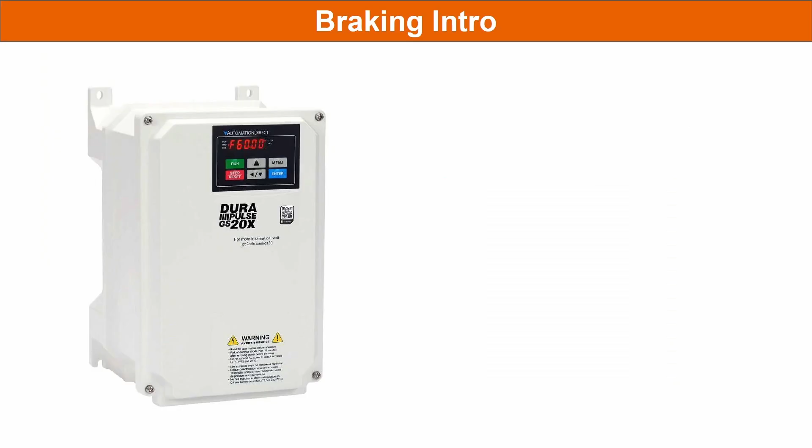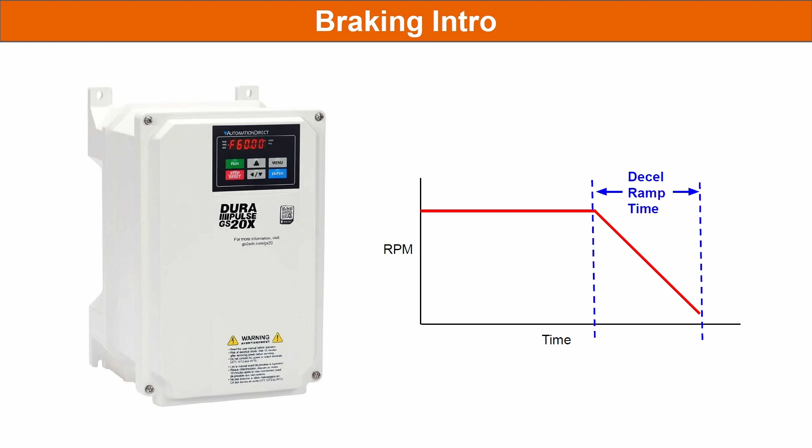When you tell the drive to decelerate a spindle, the drive automatically figures out how much reverse force to apply to get the spindle to slow down within the deceleration time. But there's a problem with that, and to understand that, you need to understand how a drive works.

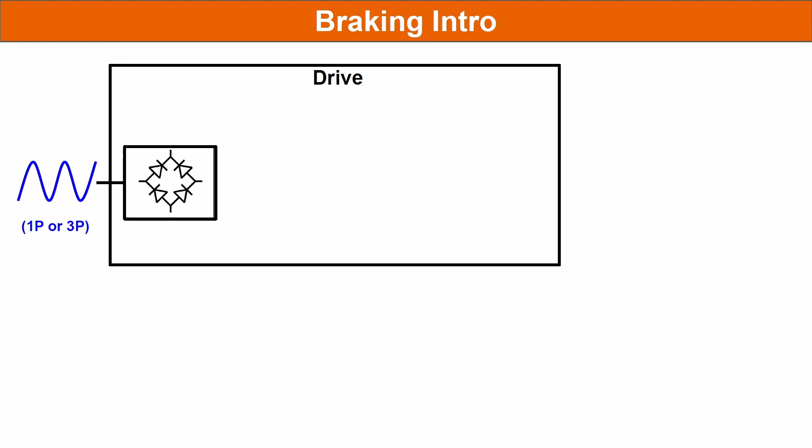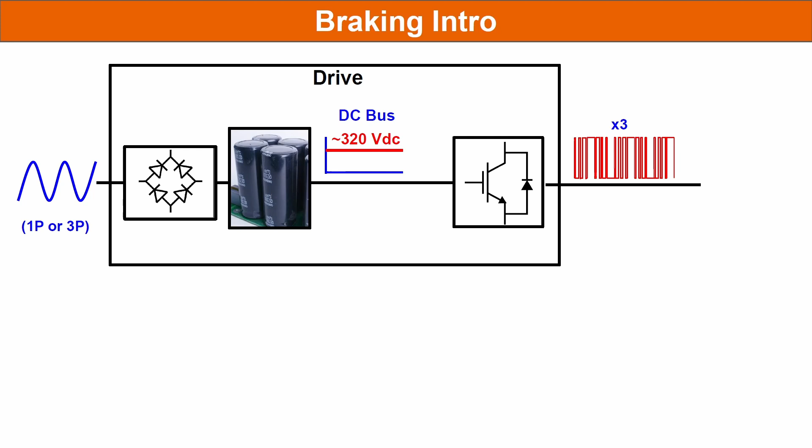In the simplest terms, the drive takes a sinusoidal input, single or three-phased, rectifies it, and sends it to some large electrolytic capacitors to create a DC voltage. For example, in the drive I'm using, the DC voltage runs in the mid 300 volt range. The drive then uses some large transistors called IGBTs to turn a DC voltage on and off in a pattern whose average magnitude emulates a sinusoidal waveform.

Because the power to the spindle is controlled by digital on-off pulses, the drive can very accurately control the motor speed by adjusting the frequency of the pulse waveform. For our spindle, a frequency of 400 Hz gets us 24,000 RPM. We'll use the terms frequency and speed interchangeably in this video since they both tell us how fast the spindle's rotating.

Here's the problem. When the drive applies pulses to force the spindle motor to slow down, all of the inertial energy built up in the spindle has to go someplace, so it gets pushed back into the drive. If you're familiar with regen on an electric car, yeah, that's the same thing. That regen pushes energy back into the large capacitors, which raises the DC bus. The faster you try and decelerate the spindle, the higher the DC bus goes.

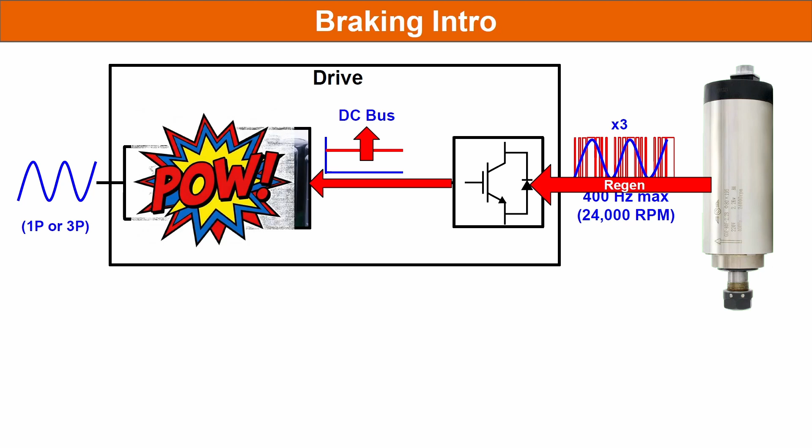If the DC bus voltage goes higher than the components in the drive can handle, well, they start to fail and your drive dies. Most drives will sense this, throw an overvoltage fault, and turn off the IGBTs. The spindle's then left to spin down on its own.

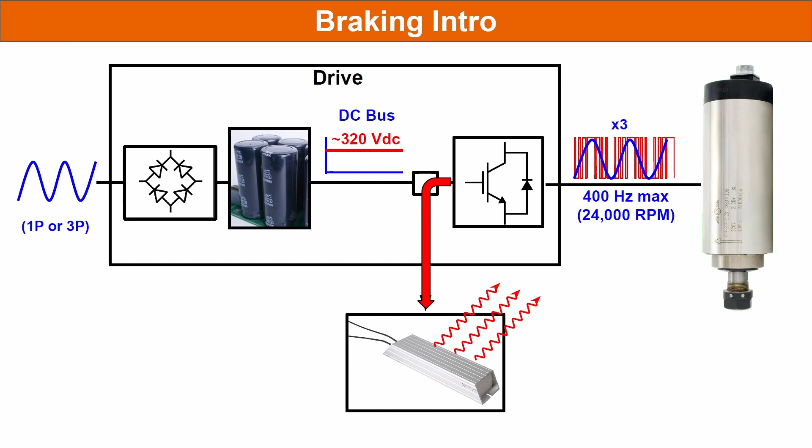The solution is simple. Add a high wattage braking resistor. The GS20 drive will automatically reroute any excess energy to that resistor, where the excess energy gets released as heat instead of raising the DC bus. On the GS20 series of drives, you just add the braking resistor to these terminals. I also added a switch so we could quickly switch the resistor in and out for our testing.

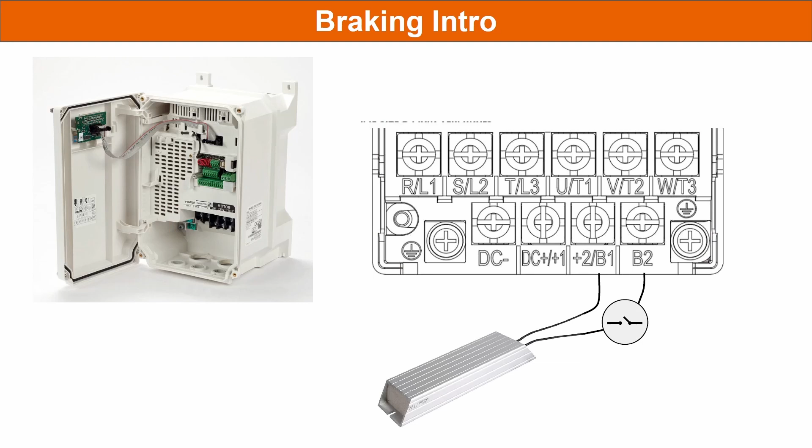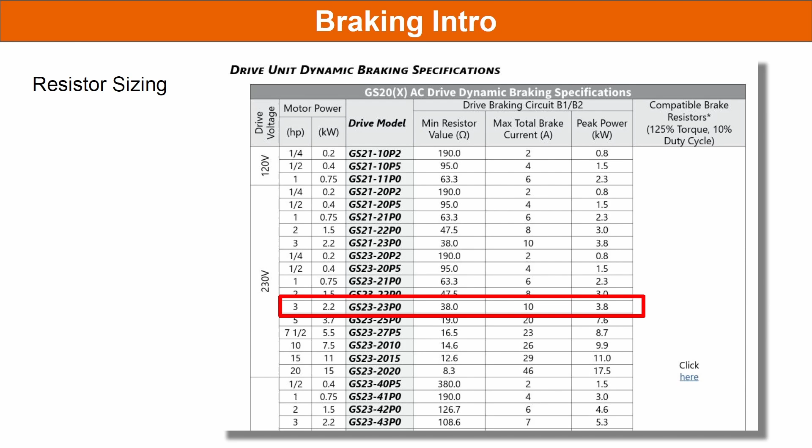How do you know what size resistor to add? Well, for the GS20 drive, it's easy. Appendix A of the user manual has a chart that says for our drive, the minimum value resistor is this, which limits the max current to this, so the max power it needs to dissipate is this. Given that, you can go to Amazon to find a resistor that'll work, or click on this guy to see all the compatible resistors Automation Direct has. Scroll down to our drive, and we see this guy is the recommended resistor.

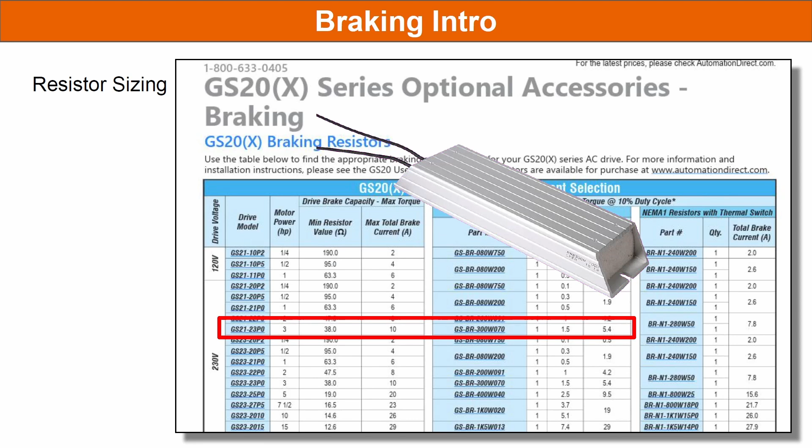That's all there is to it. No parameters or configuration required. You just hook up a resistor. Everything else is done for you.

Let's do an example. We're going to make heavy use of the GSoft2 drive configuration software in this video to change drive parameters and to monitor what's going on inside the drive. It's free, and Automation Direct has a bunch of tutorial videos showing how to use it, so I'm just going to use it here without a lot of explanation in this video. I'll put links to the free download and the videos in the description below.

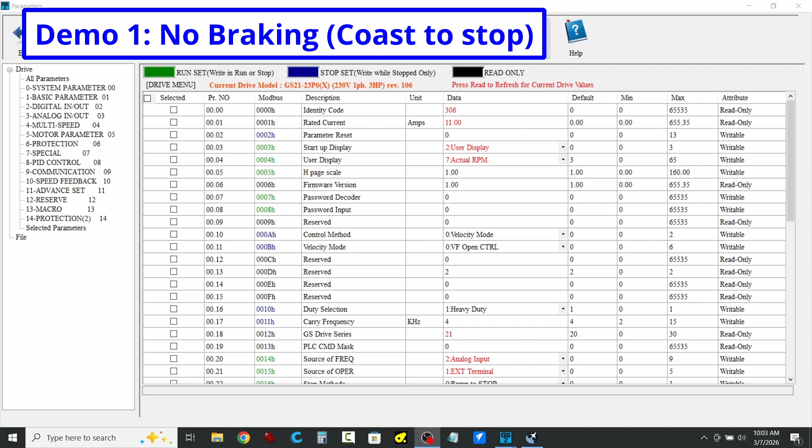First, let's see what happens when we tell the drive to just let the spindle coast to a stop with no controlled deceleration from the drive. The good news is, since the drive isn't forcing the spindle to stop in a certain amount of time, there won't be any regen to deal with. I put a large surfacing bit in the chuck just to add a little more inertia to the spindle.

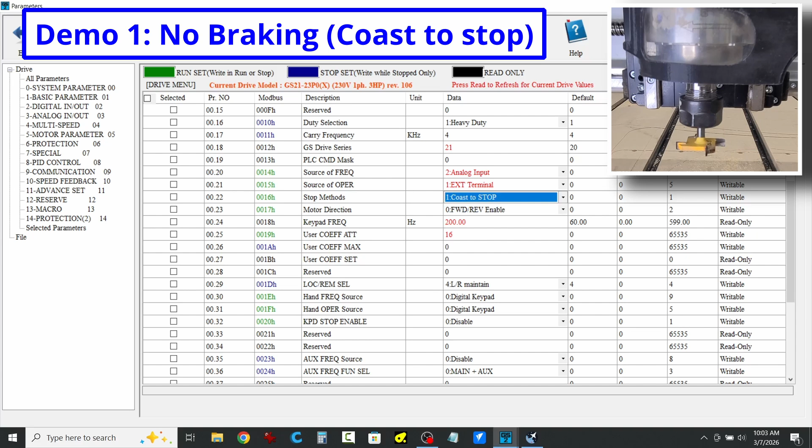Parameter 0.22 is the stop method. Set it to a 1 to coast to a stop. I love the way GSoft2 tells me everything I need to know about a parameter at a glance, no looking stuff up in the manuals. We see the write was successful.

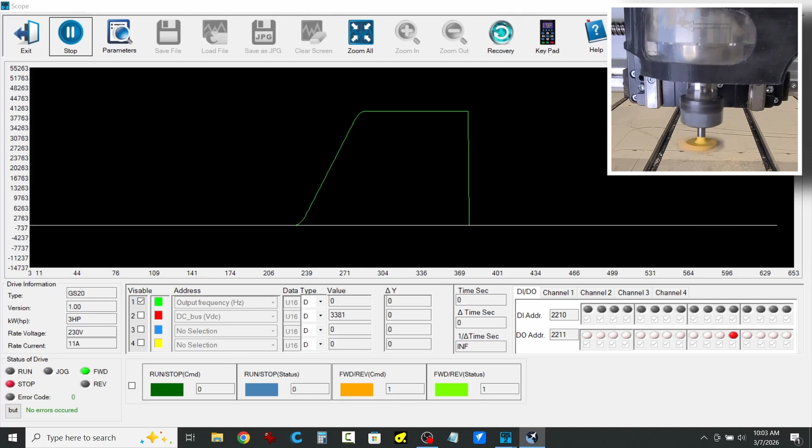I'll bring up the scope function in GSoft2 and monitor the spindle speed. Start the scope, and in GSender, I'll set the spindle to 24,000 RPM and hit run. Wait for the spindle to ramp up to speed, then stop the spindle, and wait for it to ramp down. This is going to take a few seconds. While we're waiting for the spindle to stop, I'll show you that I'm using GSender on a separate screen to control the spindle using this guy down here.

Okay, the spindle finally stopped. I'm going to adjust the scope display so we can see where the spindle ramped up to speed, and when we hit stop, and the drive turned off the IGBTs, so the drive output went to 0, and the spindle was left to spin to a free stop. So it took about 15 seconds for the spindle to coast to a stop on its own.

Now I'm assuming you're watching this video because you don't want to wait 15 seconds each time you stop the spindle. So let's do that again, but this time, let's go back to parameter 0.22 and tell the drive to do a controlled ramp to stop. Now the drive is going to try and control the spindle's deceleration. Parameter 1.13 is the deceleration ramp time. Let's set that to a reasonable 6 seconds.

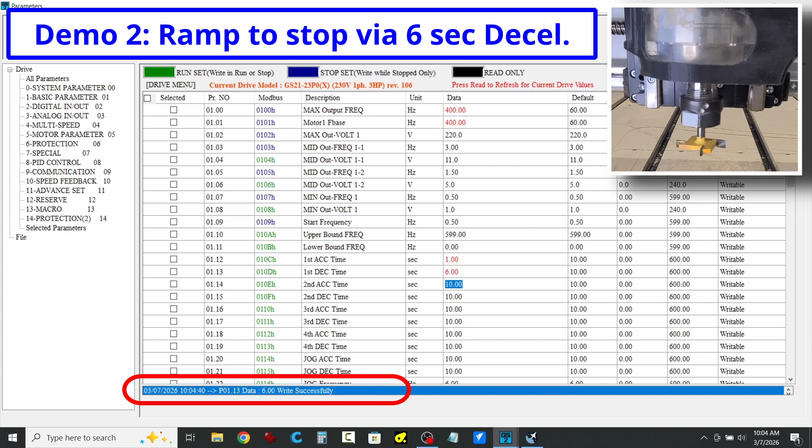The write was successful. Go back to the scope, start it, and start the spindle. Wait for it to ramp up, then hit stop. Adjust the display and measure the time it took to ramp down. Yep, right about 6 seconds. Exactly what we asked for.

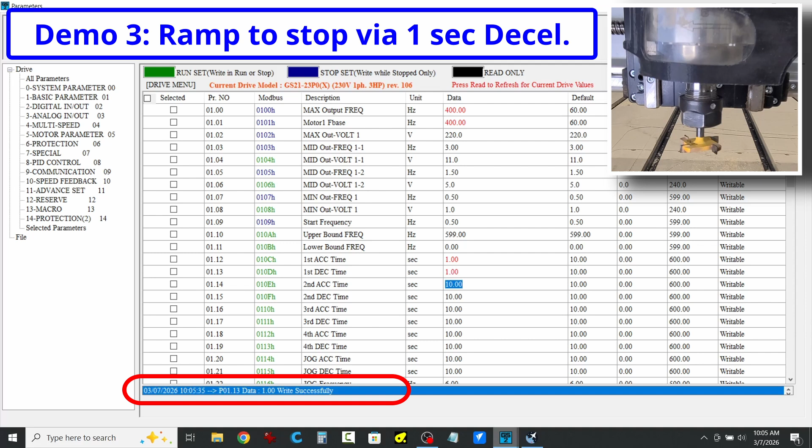Let's do something crazy and ask the drive to ramp from 24,000 RPM all the way down to 0 in just 1 second. Write was successful. Go back to the scope and hit run. Start the spindle, ramp up to 24,000 RPM, and stop the spindle. Measure the ramp time. Took a lot longer than the 1 second we asked for, didn't it? Clearly, the drive wasn't able to overcome the spindle inertia during the 1 second we asked for.

And what's the deal with these steps? Well, this is a special feature the GS20 series drives have that you won't find in inexpensive hobbyist drives. The GS20 drive is monitoring the DC bus voltage, and when the regen causes the DC bus to rise too high, it stops the deceleration ramp until the DC bus voltage comes back down. Then it starts ramping again until the DC bus voltage gets too high, when it lets the motor coast again.

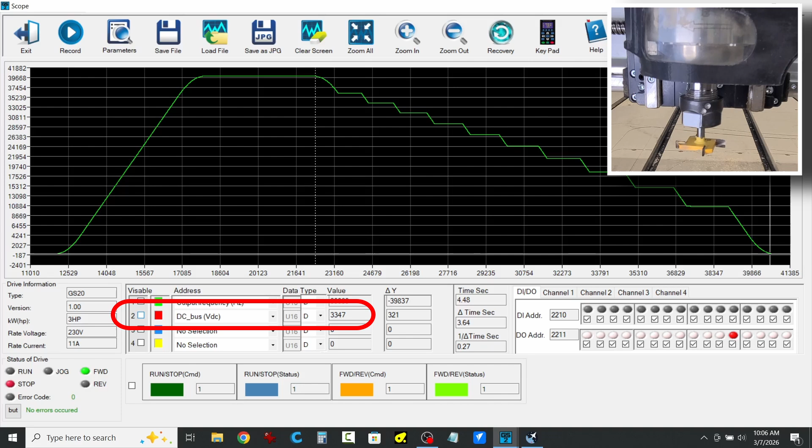You get the idea. So basically, the GS20 is pumping the brakes, braking a little at a time to slow the spindle as fast as possible without generating an overvoltage fault. And we can actually see that. If I enable the DC bus trace and zoom in on that, yep, we can see the DC bus started to rise and then come back down during the coast portion of the step. If I zoom back out, you can kind of see that.

It's too bad these two waveforms are on such different scales. It makes it hard to see everything graphically at the same time. But you can see the numbers as I scroll the cursor across the waveform. Each time the DC bus voltage gets too high, the drive turns the IGBTs off to let the motor coast while the DC bus voltage comes back down.

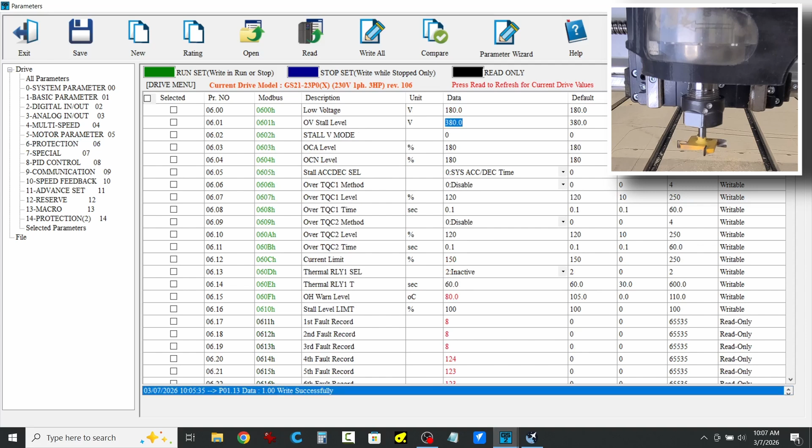The overvoltage trip point threshold is in parameter 6.01, which defaults to 380 volts for this drive. If we go look at our scope trace and zoom back in on the DC bus, sure enough, when the DC bus approached 380 volts, the drive released the motor to coast on its own.

If we disable this overvoltage stall prevention by setting parameter 6.01 to 0, what happens? Write successful, go back to the scope, hit run. Start the spindle, ramp up, stop the spindle. And guess what? We got an overvoltage fault on both the drive display and over here on the GSoft2 screen. And the spindle is spinning freely.

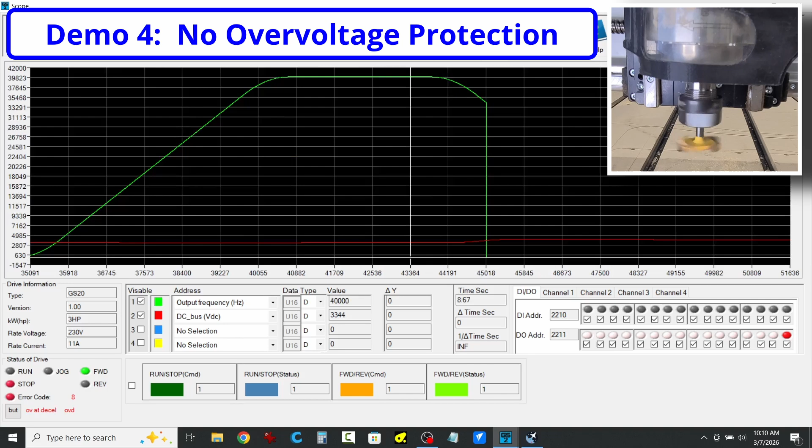Why? Because the DC bus got too big, so the drive just shut the IGBTs down to protect itself. This is how most hobbyist drives handle overvoltage faults. They just shut everything down. I'll press the stop to reset the fault. Re-enable the overvoltage protection by setting this back to the default 380 volts.

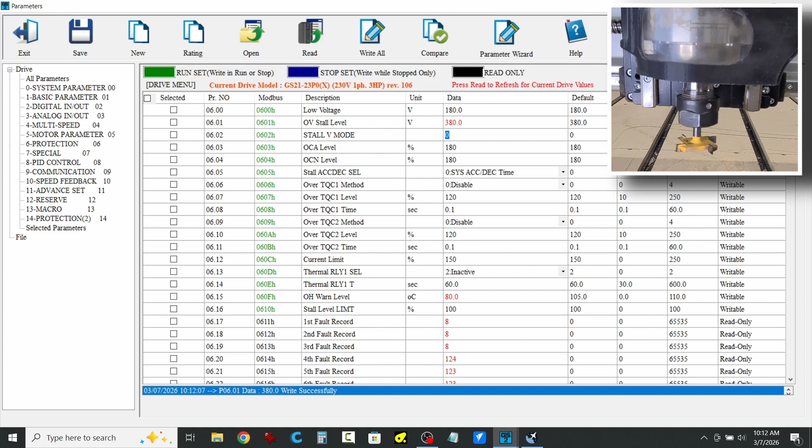Okay, so bad things happen if we try to decelerate the spindle too fast because it raises the DC bus. Got it. Now I'll flip the switch I added to enable the braking resistor and rerun that 1 second deceleration test. Start the scope, start the spindle, ramp up, stop the spindle.

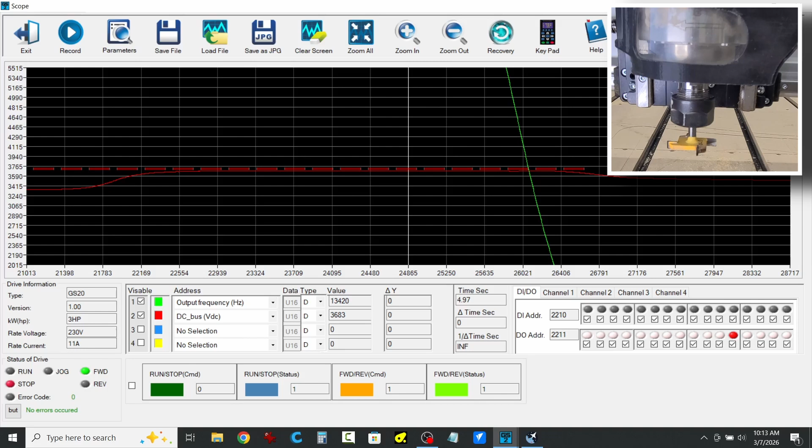Wow, look at that. It easily stopped the spindle in 1 second, and we can see when the DC bus got to this level, well below the 380 volt limit, it held steady because all the excess energy got rerouted to the braking resistor away from the DC bus. We can see how stable this DC bus was during this deceleration.

Nice. Well, that's all you need to know about braking to get super fast deceleration times on a GS20 series drive. To summarize, the GS20 braking options are: you can always coast to a stop. You'll never get an overvoltage fault doing that because you're not trying to force the spindle to slow down, so there's no regen energy coming back into the drive, raising the DC bus. The bad news is, it takes a long time for the spindle to come to a stop. Ours took 15 seconds.

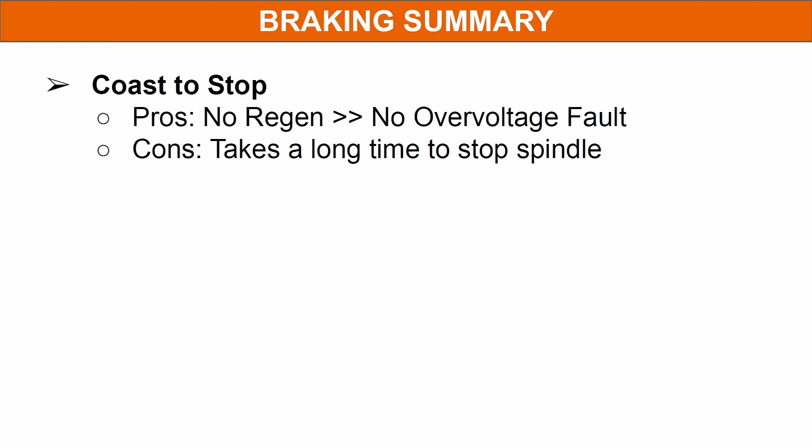You can have the drive automatically extend the ramp time to protect the drive by pumping the brakes. This gets you the fastest possible deceleration without getting an overvoltage fault or damaging the drive, and without spending any additional money on a braking resistor. It's a pretty good compromise, and again, you won't find that kind of feature in your typical hobbyist drive.

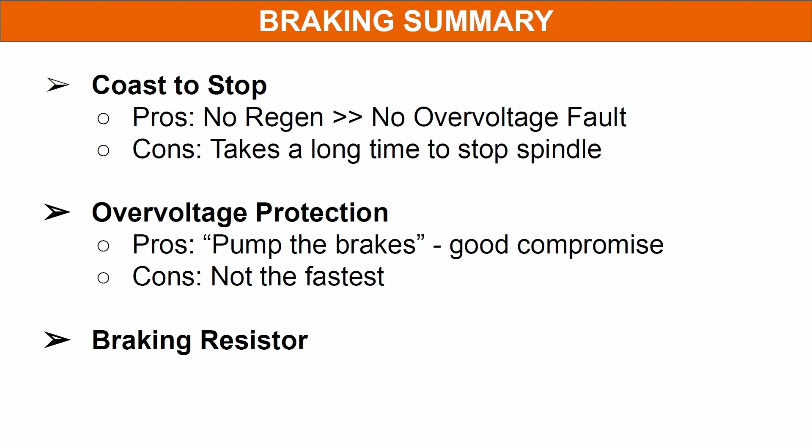And finally, you can add a braking resistor. This gives you the absolute fastest deceleration because it can dispose of large quantities of regen energy. But it costs money, maybe $30 to $50, and adds hardware to your system that you have to wire and mount someplace. But you can't beat it for performance.

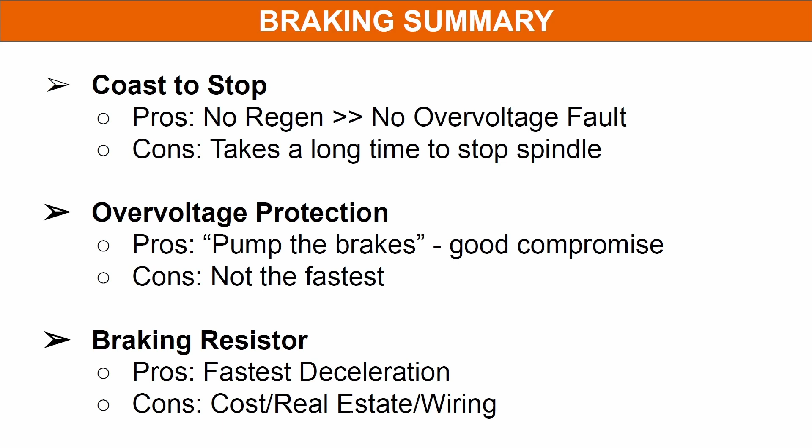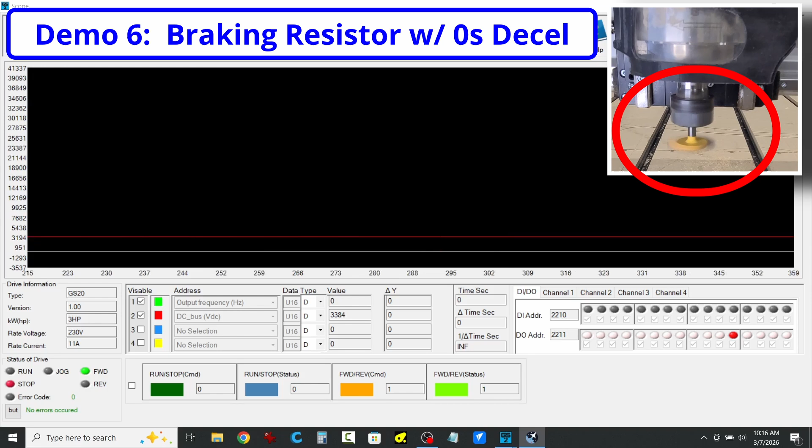Just for fun, let's go totally crazy and set the decel ramp time to 0. Now we know we can't instantaneously stop a spindle, but let's see how the drive handles it with the braking resistor installed. Start the scope, enable the spindle, ramp up, and stop the spindle. Well, the drive tried to stop the spindle so fast, the spindle was still moving after the drive was done and was just left to free spin down the rest of the way.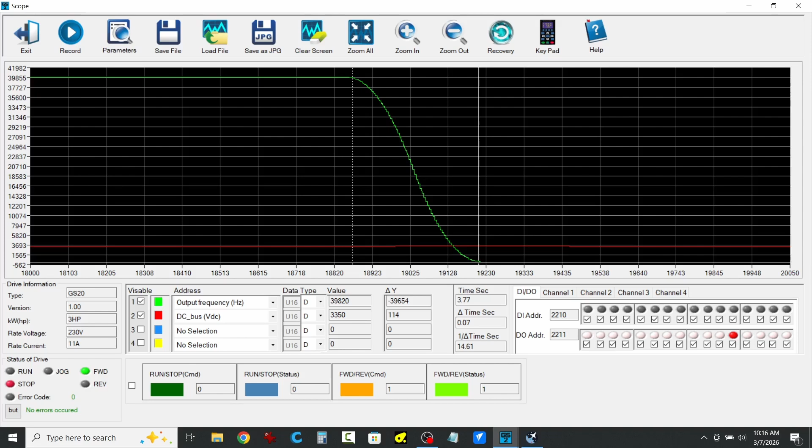So even though the drive was fast enough to do it in theory and the DC bus was totally protected, real-world physics got in the way. The spindle motor hadn't quite finished spinning after the drive was done. Is there anything we can do about that? Actually, there is. It's called DC braking. It tells the drive that instead of fully releasing the motor after ramping down, it should apply a little DC current to hold the motor in place.

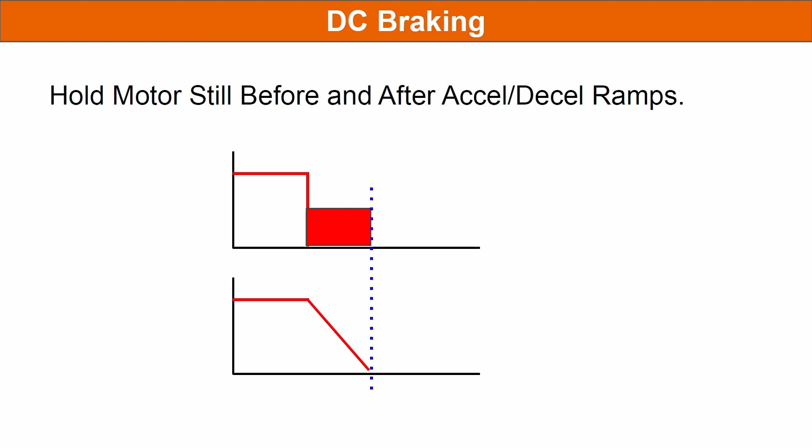This is a duration parameter. That is, how long should the drive hold the braking current? Well, that's a little silly for us, right? If we tell the motor to stop in 0 seconds, then add a few seconds of DC braking current, well, why not just set the deceleration to a few seconds and have full control over the spindle deceleration?

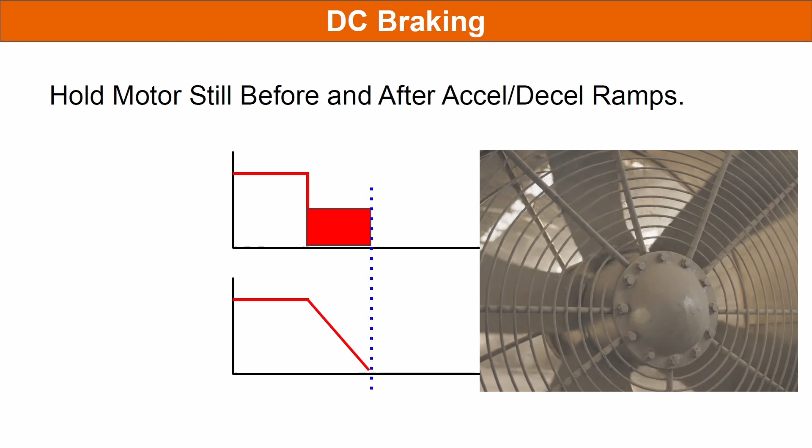DC braking is really intended for things like large industrial fans that might be rotating because of a draft in the room. DC braking is normally used to hold the fan still both before starting the drive to ramp up to speed and to hold the fan still after the drive is done ramping down. Now, could you play with that here? Sure, but it's not really worth the trouble, especially since we know we can easily ramp our spindle down in less than 1 second. If you do want to play with DC braking, these are the parameters to look at.

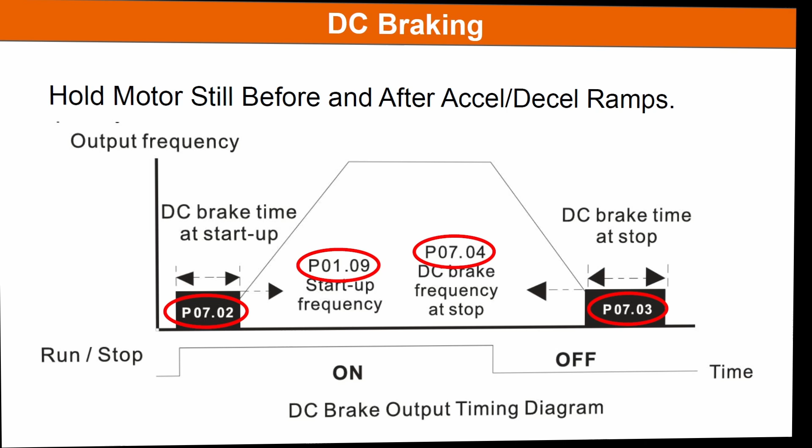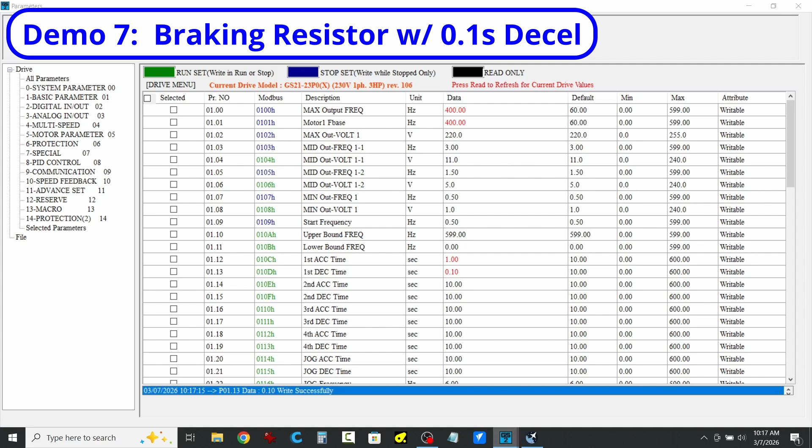So how aggressive can we be with a braking resistor? Instead of trying to ramp the spindle down instantaneously in 0 seconds, which is ridiculous, what about a 1/10 of a second deceleration? Not 0, but darn close. Any chance it can handle that? Well, let's try it. Write was successful. Bring up the scope, run. Start the spindle, ramp up, stop the spindle.

Holy cow, it worked. And the DC bus was held at a reasonable level, so the drive is perfectly safe. The GS20 Series Drive just brought a 3 horsepower spindle to a complete controlled stop in a fraction of a second. That's amazing. Bottom line, the addition of a simple, inexpensive braking resistor to a GS20 drive gives you incredible control over your spindle.

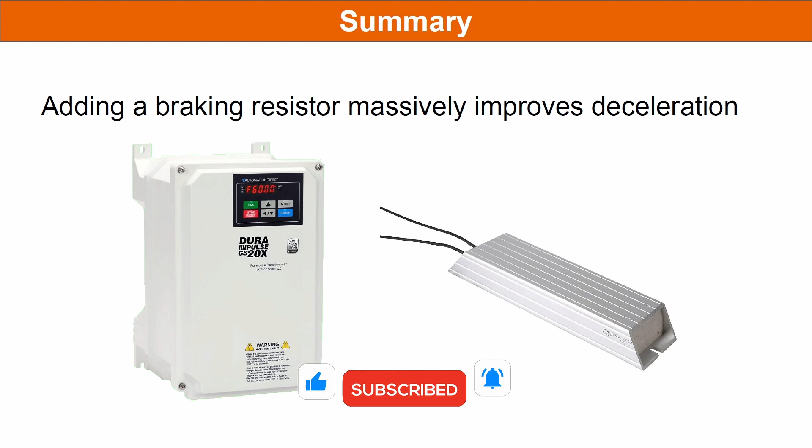One final thought. How awesome is this free GSoft2 drive configuration and debug software? It makes changing and backing up parameters super easy, and look at all the different things you can monitor with the 4-channel scope function. And I love that virtual keypad.